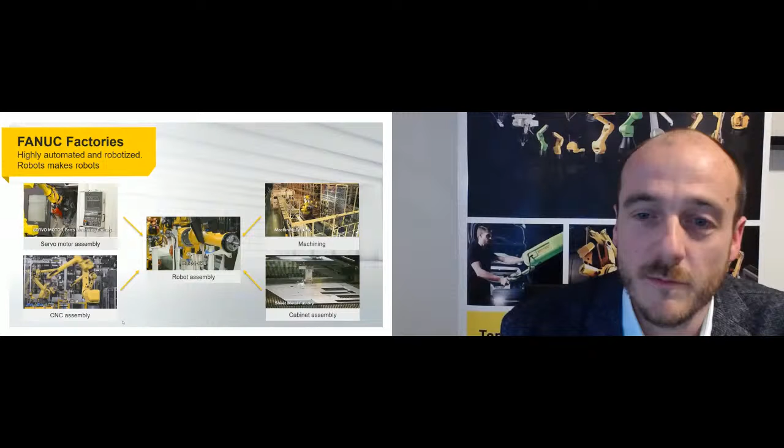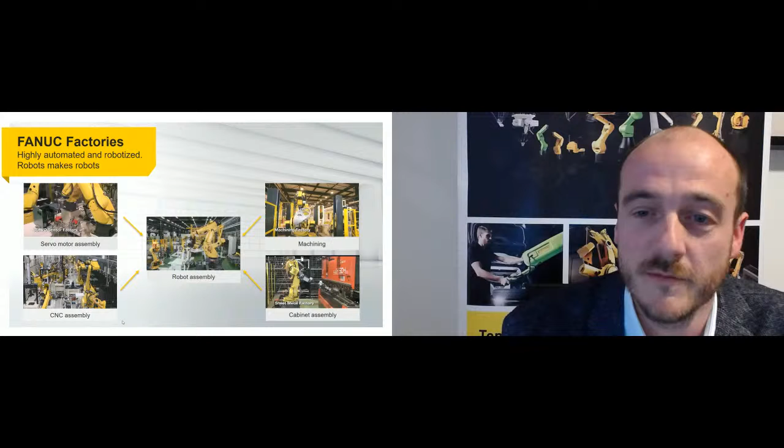Fanuc is the automation factory, and we state that especially when we have a look into our own factories. We live automation in our own factories, which means we have a highly automated and robotized factory. In our premises, robots make robots. This is not just a story, as you can see on the videos shown below — these are real screenshots directly from our factories. Our factories have numerous robots in place; right now we're talking about several thousands of them in our own factory.

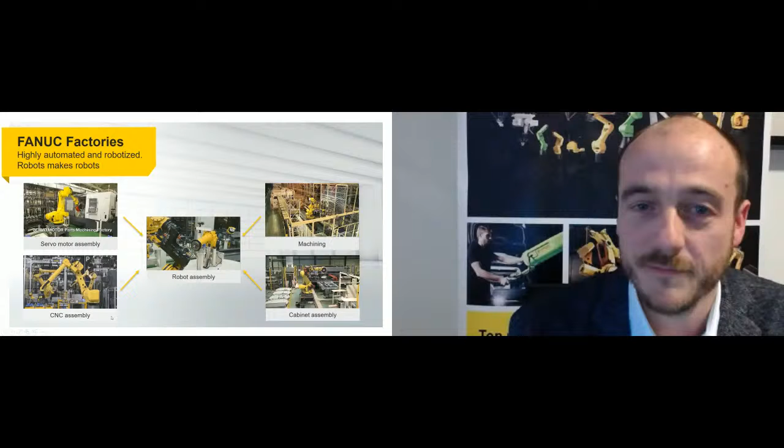Fanuc's range of robots is very wide — we're talking about more than 100 robot models. Here you can see a short lineup of our models, covering a payload range starting from 0.5 kg up to 2.3 tons, across different types: articulated series, SCARA series, palletizing robots, delta robots, paint robots, and collaborative robots.

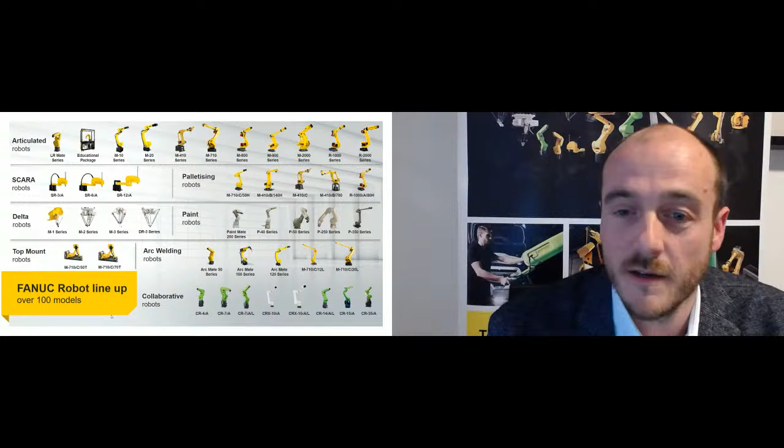Today I want to talk not only about typical Fanuc or industrial robot application areas — applications you probably all know, like spot welding, arc welding, painting, typical handling applications like loading, unloading, or palletizing. Another very interesting application is washing, which you can see on the bottom right corner.

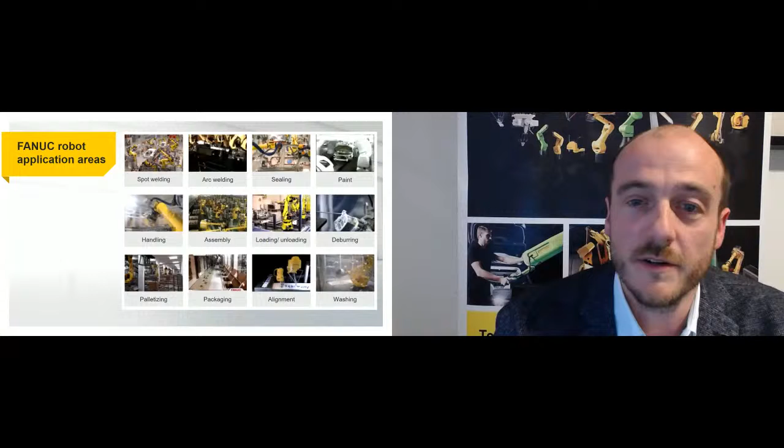Today, I want to talk about some solutions for rather new fields where industrial robots may be applicable. I want to start with our solution for high accuracy applications.

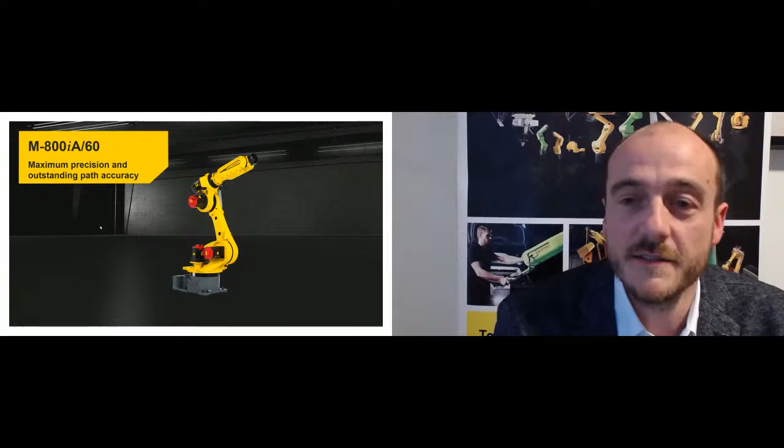This is rather something that was more related to conventional automation solutions like gantries or other forms of automation. Today, I want to introduce our brand new M800 series, our industrial robot with maximum precision and outstanding path accuracy. But it's not just an articulated robot with 60 kg payload and 2 meters reach — the robot comes with additional features like high rigidity, a robust construction specifically designed to increase precision in the application.

It comes with IR calibration signature, meaning it's an absolute calibrated robot, already included as standard. It brings high accuracy, ideally suited for laser applications or others, and has very fast and accurate motion, especially in narrow corners, which improves the quality of laser cutting or laser welding, for example.

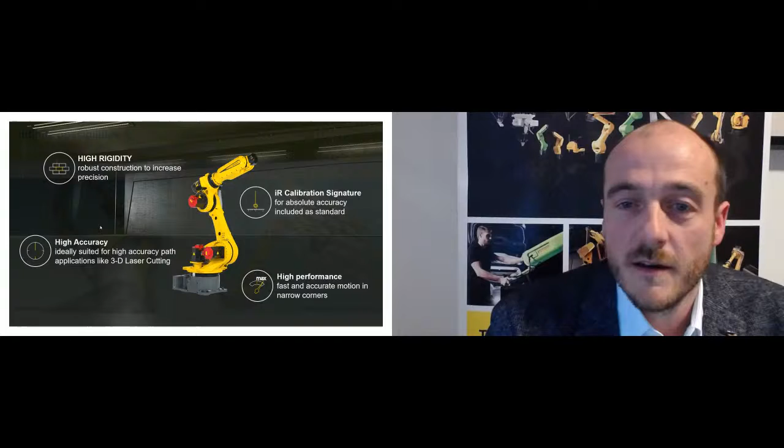Another example of a high accuracy application could be drilling systems, known from the aerospace industry or other markets where drilling or milling with robots is considered. We have that solution ready to go with the new M800.

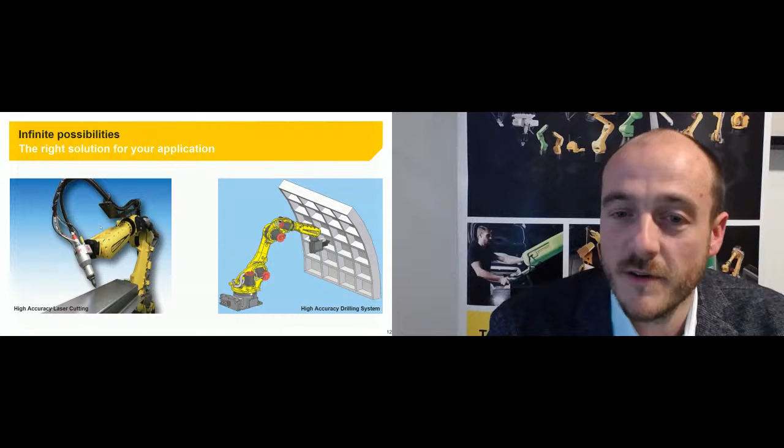On the next slide, I want to show you a quick video on the capabilities of the robot. You can see very fast motions with high precision, especially in the corners. This can be used, as I said, for laser welding, laser cutting, and probably other applications you may have in your facility.

I want to come to another point. I want to introduce to you our solution for human-robot collaboration. And therefore, we introduced a new era of collaborative technology.

We introduced this year our brand new CRX series. The CRX series is our new collaborative robot. You probably ask yourself, what does the abbreviation CRX stand for? It just means, in other words, collaborative robot, and the X stands for the next generation.

The CRX itself brings lots of brand new features with it. As you can see here on the slide, some bullet points: it has a complete new lightweight ergonomic arm design, which you've probably never seen before on a Fanuc robot. It has a brand new lightweight compact controller, which runs with 230 volts standard.

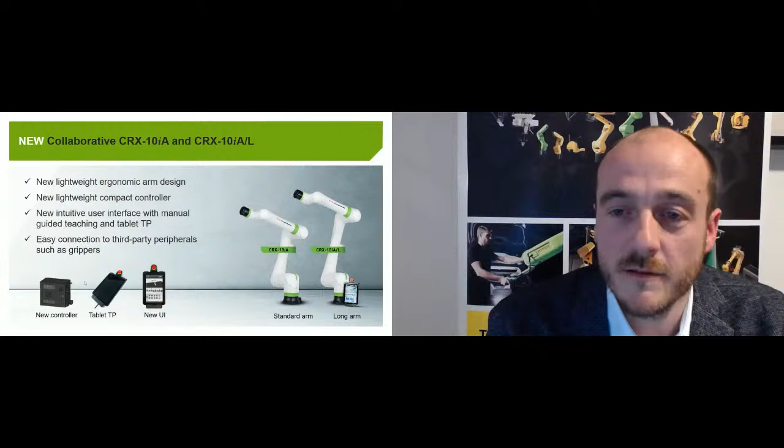It has a completely new intuitive user interface, which can be controlled and used with manual guided teaching, and of course a brand new tablet TP with our new interface. It also brings an easy connection to third-party peripherals, such as grippers or other equipment, which may be used together with that robot. And therefore, we provide several possibilities to do your own app design and bring your functionalities together with that new robot.

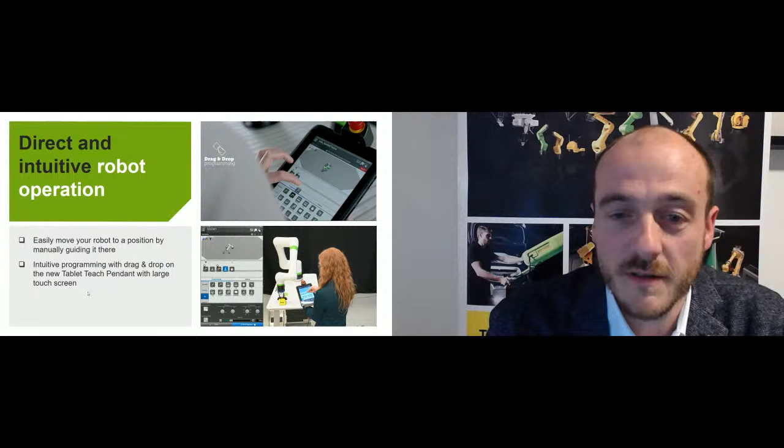I want to go a bit deeper into the new interface and especially the direct and intuitive robot operation. That means, in other words, you can easily move your robot to position, of course, with manual guiding. This is probably known by one or the other cobots as well, with our standard robots. But what the CRX series brings with it is the new programming, which works with a completely simple drag and drop programming on that new tablet TP with a large touch screen, which you can see on the next slide.

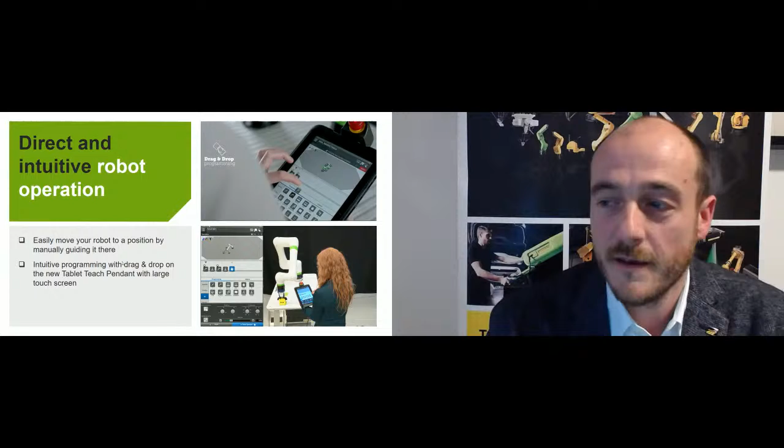There you have a screenshot of the new app, the new interface, and it is divided into 4 sections. That brings the status bar in the very top of the screen, where you can find some drop-down menus and status icons to navigate through the app itself. You have a 3D view panel, which shows, in this case, the robot itself, but you can show it also together with the environment, with some grippers or other equipment surrounded by the robot. This typically helps you to graphically display the robot status, as well as taught positions or the complete program itself.

In the next section below, you find the timeline program view, which brings an intuitive program representation and a very simple program navigation. That means via drag and drop, coming from the programming panel on the very bottom of the screen, you can put the icons to the timeline, and with that simple action, you generate your program and are of course also able to adjust parameters in the details section, which you can see in this area.

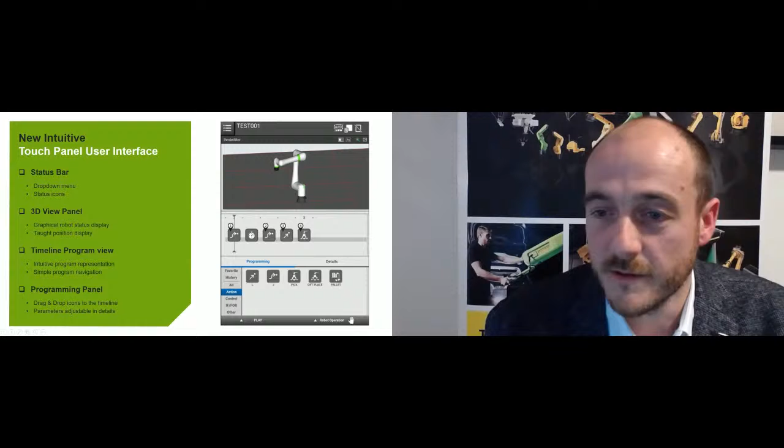Of course, when we're talking about cobots, we are not talking about typical robot applications. And in the very beginning, I said I want to introduce you some solutions, but solutions is not only the product itself. When we pay attention to cobots, we typically do not speak about low cycle times or high-speed applications, robots behind fences, or even dangerous tools, like you can see on that picture.

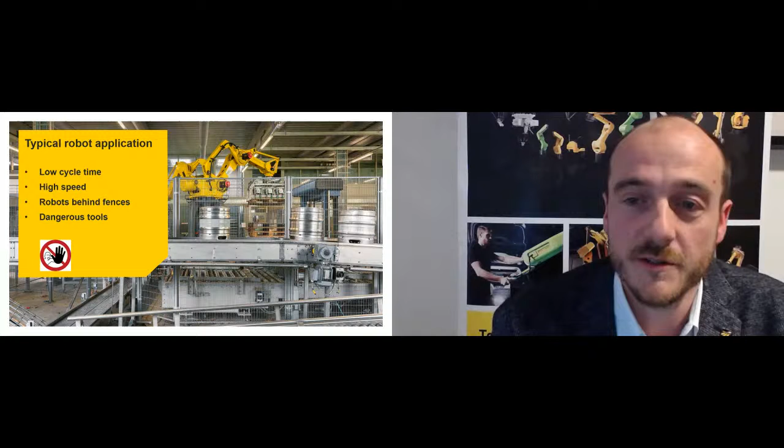I want to talk about solutions with our new colleague, the colleague robot. And therefore, of course, employee acceptance is a very important point to work hand in hand with the robot. And therefore, to provide you a real solution, we developed a new guideline to ask yourself whether cobots are considerable in your daily business.

In your factories, we created 7 steps for that reason, and I want to introduce you now to these 7 steps one by one. So the first step of all, of course, is you have to assess your current business and possible barriers to development. That means you should ask yourself, which markets could you enter with better quality?

Of course, if you talk about robots or automation, one of the most important factors is always to increase quality, and of course customers demand that as well. The next question you could ask yourself is, what would your production capacity be on a 24-hour, 7-day basis? If you're talking about small or medium-sized enterprises, probably only 1 or 2 shift models are in consideration today. But introducing robots could considerably increase your production capacity itself.

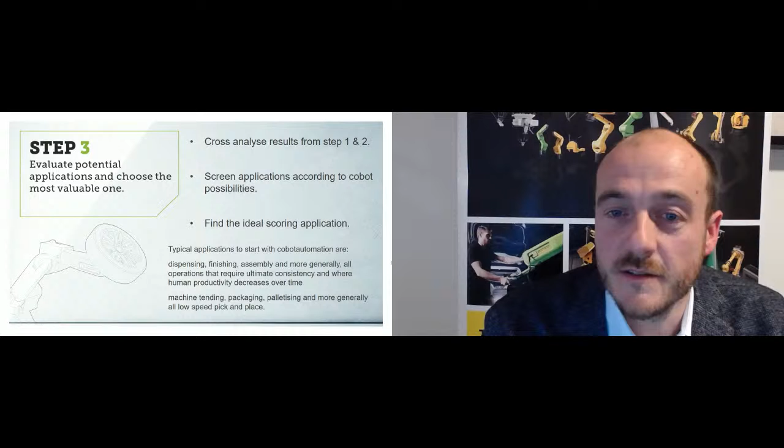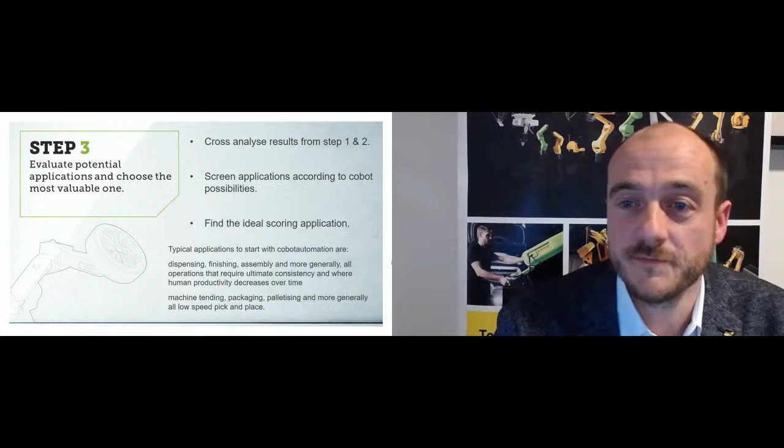That means cross-analyze the results from the first two steps, screen applications according to cobot possibilities. That could be pick and place applications, quality applications, finishing or assembly applications, machine tending, packaging, palletizing. In other words, there's a full range of different applications where cobots might be implemented, but you have to find the ideal scoring application.

Step 4 is eliminate safety concerns. So if you identify the kind of collaboration, you have to identify: do the robot or cobot and the employee work on their own but share only space? Do they collaborate indirectly with humans? Does the cobot assist humans in a particular task, or does it collaborate directly with humans? These four different scenarios bring up different possible applications and different needs for the application at the end of the day. That means make sure you will always be able to use your cobots wherever you plan to.

Step 5, of course, ROI. When it comes to money, you have to define the return on investment and especially the time frame. So you could value all expected benefits, as I said before, coming from higher production capacities, coming from better quality. Set your investment cost targets.

When we're talking about investment cost targets and cobot automation, given the investment of a cobot application, you typically find out that it is way lower than a conventional automation project. Therefore, you can expect the ROI coming faster compared to standardized automation. And when you do all these steps and find out the ROI is exactly where you want it to be, then you could choose your right cobot, which comes with the application as said before.

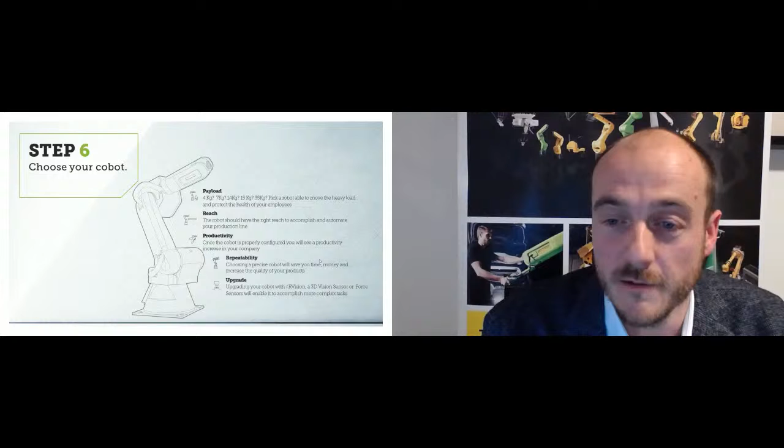And the last step is also a very important one. Our recommendation is really look beyond your first cobot. This is necessary - use your first cobot to reveal passion for robotics in your company with your employees. Nurture curiosity about robotics in the automation world itself, and as the last step, get ready for new applications.

Here we have a quick checklist for recap, so you can quickly assess these topics. Assess current business and barriers to development. Address automation starting from your most valuable resource, your employees. Evaluate potential applications and choose the most valuable one. Eliminate your safety concerns, define your ROI and the time frame. Choose the right cobot, and once it's installed, look beyond it.

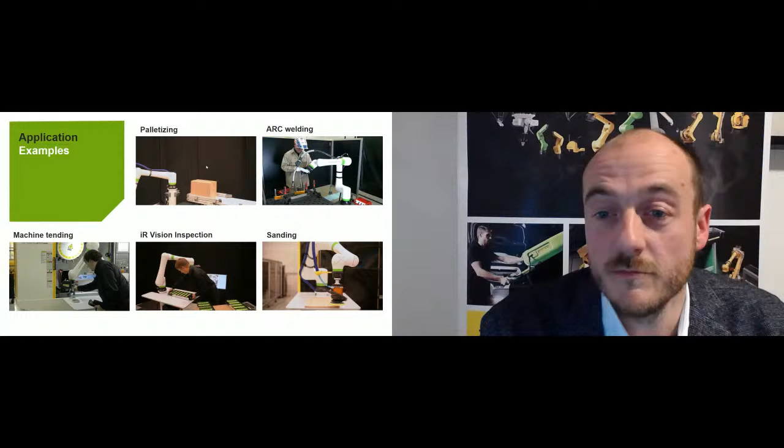Now I talked a lot theoretically. I want to show you some real applications coming out of the field, which shows you the broad range of utilizing cobots. The first one is palletizing, where with manual guided teaching, you can simply position and program the robot for your palletizing tasks. You quickly install the application, and the robot takes over a task which is, compared to an operator, probably very exhaustive.

Another interesting application for cobots, especially the easy programming and intuitive interface, is arc welding. In the last months and years we've seen a big increase in using cobots for arc welding. The advantages are definitely a very easy setup, especially for small lot sizes. You can easily adjust and teach the robot to carry out typical arc welding tasks, and given the high rigidity and good performance of the robot, you can ensure a proper weld seam.

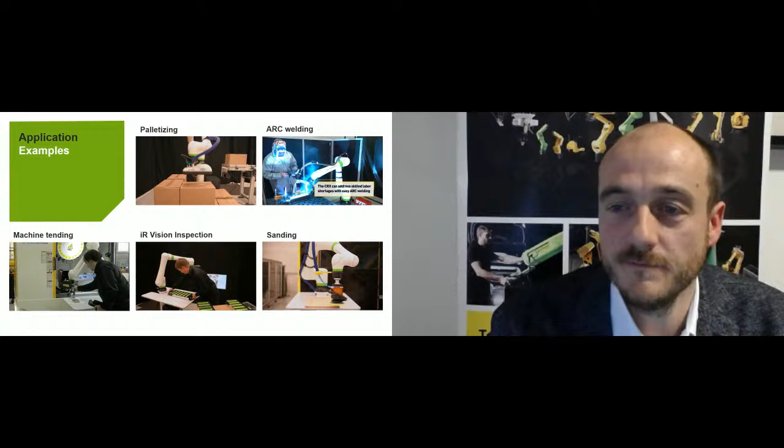When it comes to machine tending, the cobot can assist you in a very easy way. Again with manual guided teaching you can simply adjust it to new products and new tasks. You can enlarge the scope with additional camera systems to find raw parts on a pallet, and then easily connect it to your milling machine, lathe, or whatever. Often the robot is placed on a small mobile facility, so you can load different machines very easily and bring it from one station to the other.

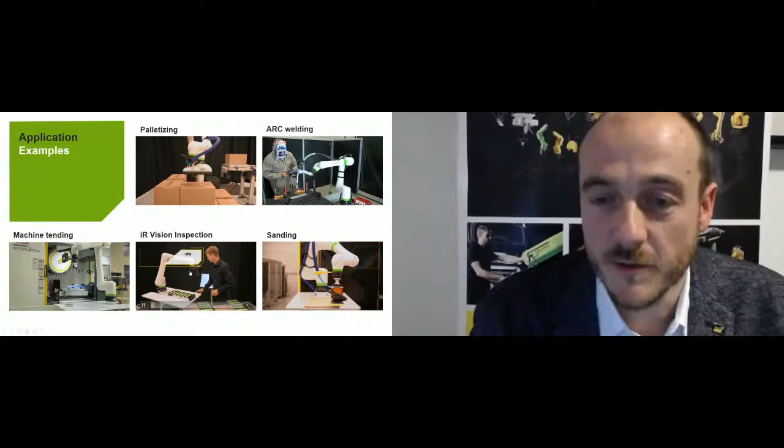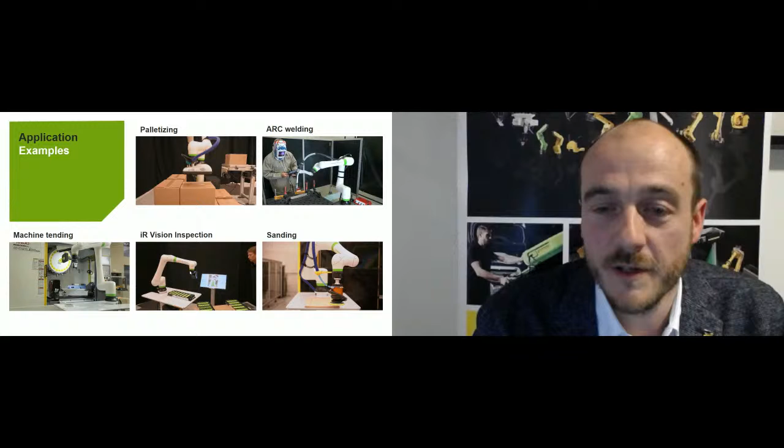Quality inspection is also a very interesting application for cobots. In this example, the robot is used for inspection of battery trays, and the system compares images to the actual parts and defines IO and NIO parts. Here's another example: this one does not pass, so the operator places the red button onto the tray, and the quality is ensured.

The last example I want to show you is sanding. Cobots are also used for sanding applications combined with additional force sensors, for example, which allows the robot to smoothly finish surfaces, as shown in this video.

That brings me to the end of my short introduction to new solutions for industrial robot applications. And I want to leave you with one last question: why settle for less when you can get more? At this point, I want to say thank you for your attention.

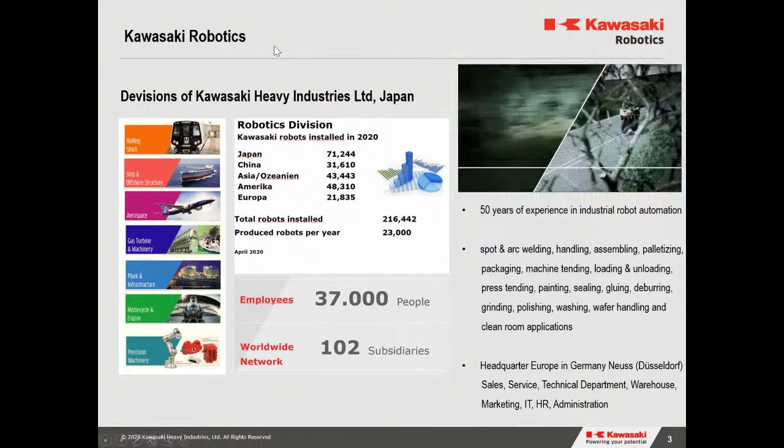In the next few minutes, I will speak about arc welding in combination with mid-sized companies. But first, let me give you the entry into this subject. Our vice president said a good sentence: nothing is more constant than change. And I think that is very easy to understand.

We had 4 industrial revolutions: the mechanization, the first mass production, then we had the computers and the first robots, and then we talked about machine networking, the IoT, the digitization since I think 2 years. But my point is, don't forget the low-hanging fruits, and that's a very important point for the medium-sized companies. The low-hanging fruits are often forgotten. Instead, companies believe that the use of artificial intelligence for process automation is a must-have. And I think, is that always the right way? I think perhaps, but I think Kawasaki has the job to provide easy solutions for process automation.

But to understand it in medium-sized companies, I think we must clear the question: what exactly does process automation mean? Automate recurring processes, it's clear. Increase productivity, okay. But I will show you in the next slides what is very important for the medium-sized companies.

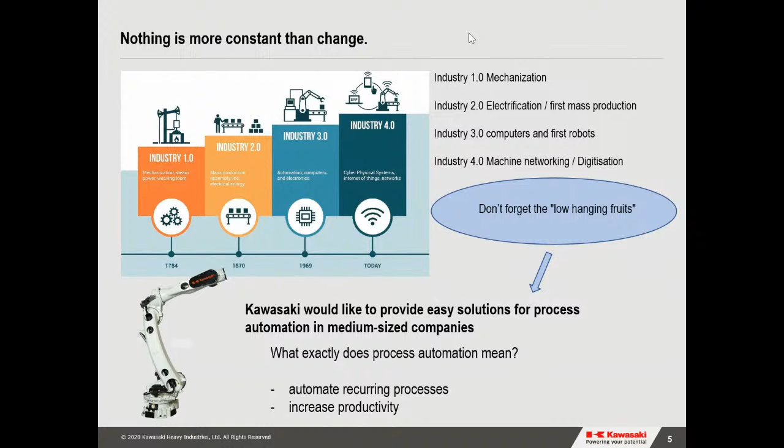The current situation, as I told you, is not so easy. Let's have a look at the current situation. COVID-19 is a very big problem - the pandemic has shown how vulnerable supply chains are. If more companies produce locally here in Germany in the future, I think robotics will play an important role.

The last few months showed in my discussions with customers that everybody in medium-sized companies wants to automate, yes. And they see the need, but they have strong reservations. That's our job, to find a good solution.

Why reservations? We have the high cost, the technical hurdle, expert knowledge is needed. A very big point is that mid-sized companies often do not know what it includes and where to start. My job and the job of the German sales team of Kawasaki Robotics, and all over the world, is to find the right solution.

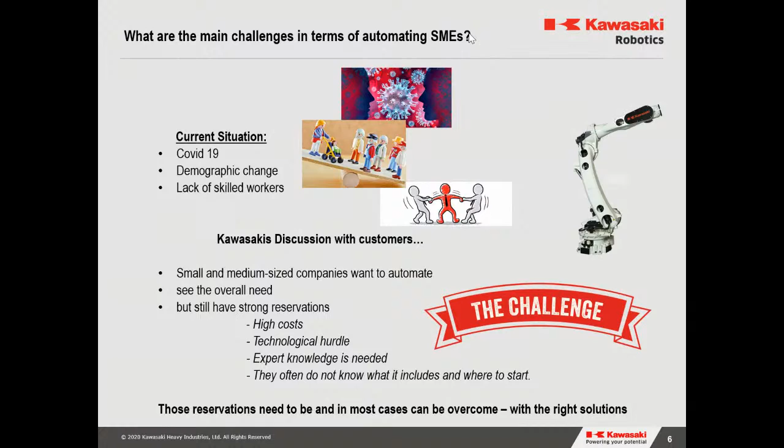But the very big point is that we give the right solution for the medium-sized company. Advantages are clear: higher output in production, production on a high quality level, you save time and cost of course, less monotonous work. It's very important because you can give the good workers more important tasks. Ergonomic working conditions are very important because you let the robot do the difficult work. So when you have the right solution, you can secure the production of the medium-sized company, here in Germany and all over the world, on a long-term run.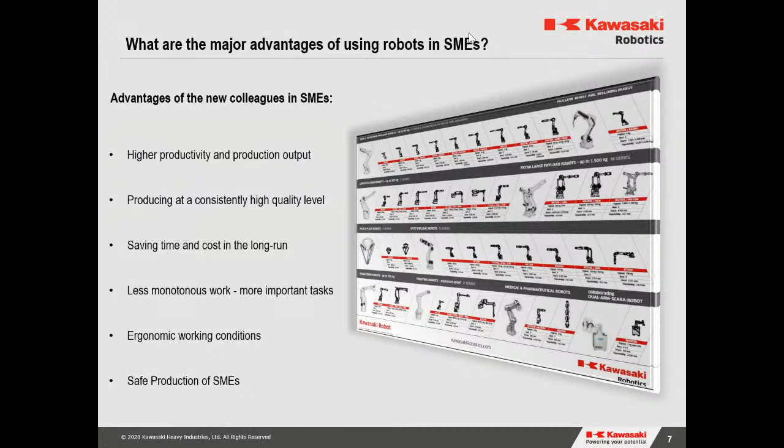It is important for small and medium-sized companies to make their own experience with robotics and automation. Only when they do their own experience do they know what is good and what is not good. My experience at Kawasaki Robotics is when they see the high quality, the little downtime, production at night and on weekends, and that the robot is not ill, then they can understand where they can use robotics. So the start is much easier, because when you have one robot, it's not a long way to install robot number 2, robot number 3, and so on.

We at Kawasaki Robotics pay attention to user-friendly systems. Acceptance is determined by the quality of the new interfaces, and that's very important. It must be a plug-and-play solution.

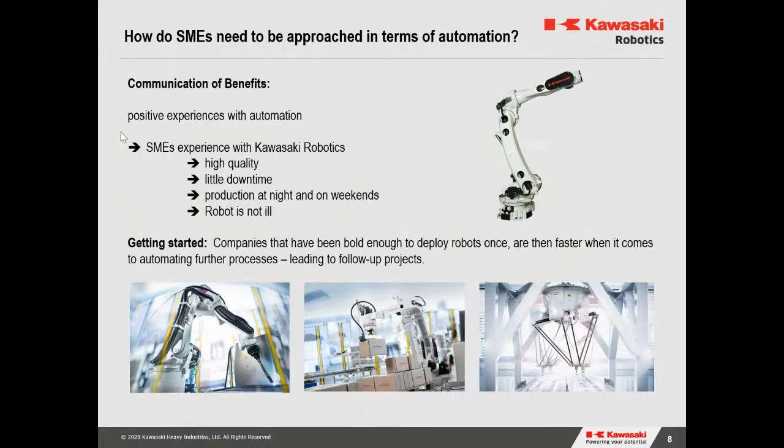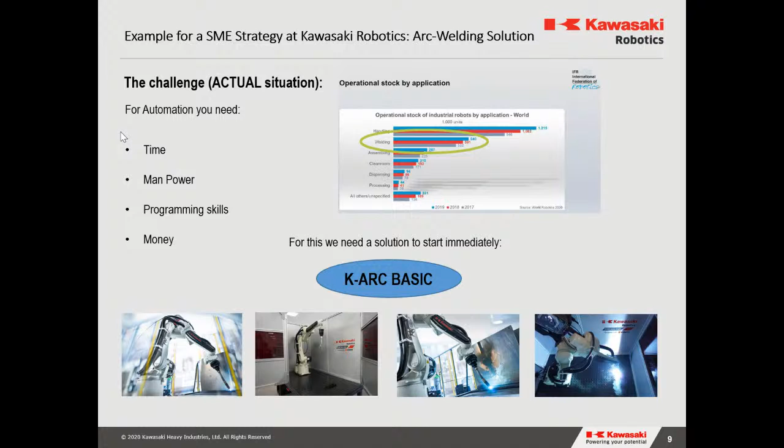We try to combine the advantages of automation with the flexibility of an experienced welder, and that's it. We need good quality, high speed, good efficiency, and no downtime. The Kawasaki Robotics K-ARC Basic Single offers a complete turnkey arc welding robot solution for your production.

Everything you need is within one compact cell, suitable for MIG and MAG welding, flexible and powered by a Kawasaki robot — for example, in this case the BA006N, which is only the name of the type. The robot, and we have some more high quality components. I will give you an idea of plug and play. K-ARC Basic Single provides everything you need to automate your process.

When we go into the technique, it's much easier to understand. You have a complete cell with a safety module, Cubic S, included, and complete arc welding equipment. It's ready to weld. I think this is a lower barrier to entry for medium-sized companies. But this is only the hardware.

Yes, first we have the hardware, and now we need the software to have much easier programming than in the past. Because in the last 20 years — as one guy in this presentation told us — nothing changed. Everybody thinks it is a hurdle to program a robot.

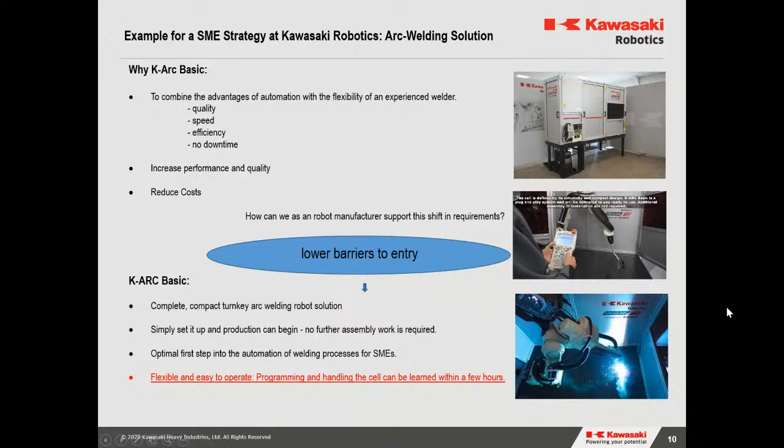We have the software K-Virtual. That's a point I will point out. With K-Virtual, Kawasaki Robotics has a new 3D simulation software for plant engineering, robot simulation, and offline programming. With K-Virtual, we offer you the optimal tool for planning your individual SME automation solution. It's very fast to learn, and it saves time and money. You can see it on this video.

When I worked at a medium-sized company as a machine builder, we always had 3D programs, but it was not so easy. This is an intuitive program where you can have all our robots, and you have the digital program of the process.

So we have the answer to this question: who should program so many welding robots? You. That's the answer, you with this tool. It's intuitive, easy to learn, only in a few hours. In our academy in Neuss, we have the possibility to show you this tool.

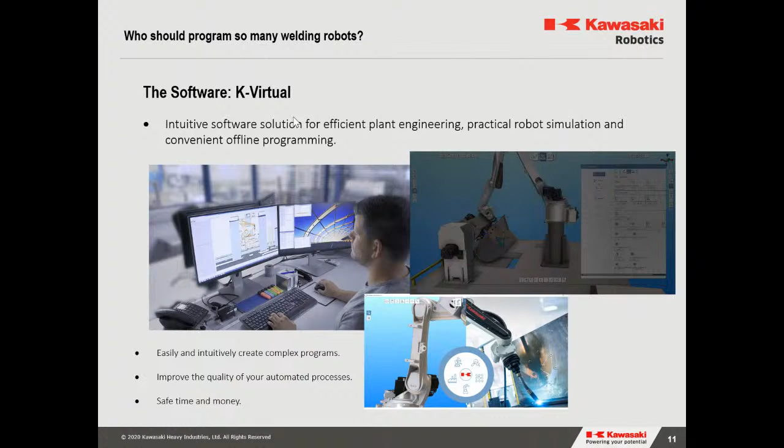Now we had the hardware, we have the software. But what is hardware and software when you have nobody to take care of you? So we take care of you with our service department, with our service guys. I think very important for this is the principle of MVP, meaning Minimum Viable Product - quick and simple solutions that support you with intelligent algorithms.

We have two new Kawasaki service concepts since a few months. On one side, the Trend Manager. This software automatically analyzes all data of your robot, so we can use it as a diagnostic tool to predict inspections and give information about problems at an early stage. On the other side, we have the smart glasses.

Everybody here knows downtimes and shutdowns are the worst case scenario. I'm sure predictive maintenance with Kawasaki Robotics concepts reduces this risk to a minimum.

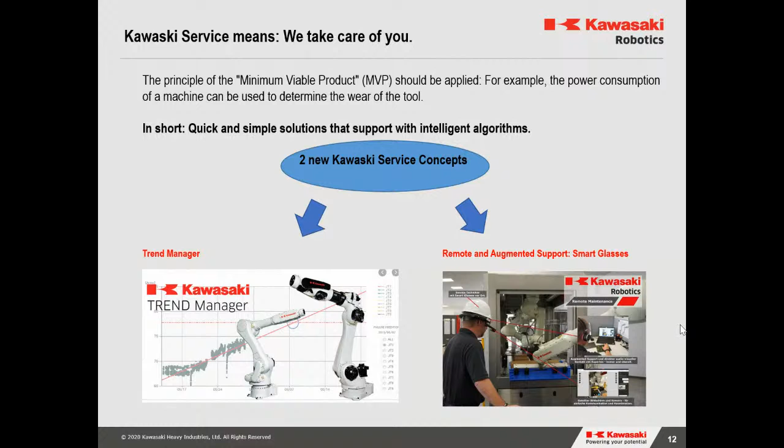To complete our portfolio of arc welding products, you can see here the robots as well, that's a basic of course. You can see the positioners, they are very new - we have our own positioners today. And the linear tracks here. But sorry guys, due to the lack of time, I am not able to discuss these products.

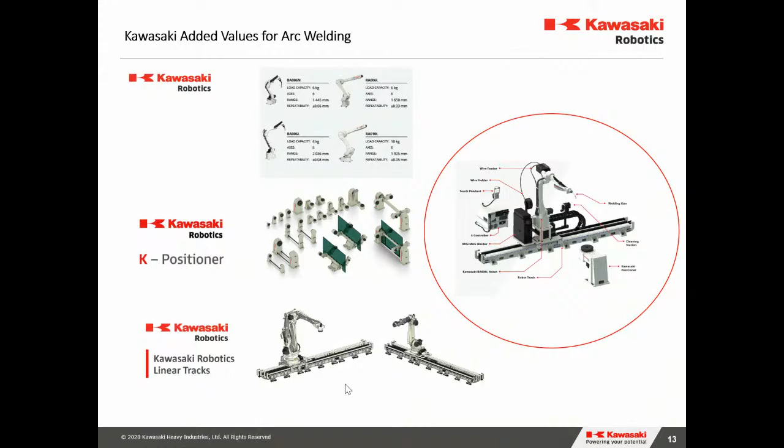So I think it's very important to come to my conclusion. Every time I think it takes people and technology. In the market there are a lot of innovative technologies, in a starting position, offering new possibilities for medium-sized companies. Not doing anything would weaken the mid-sized companies' competitive position, making it difficult to win the challenges in the future. So my recommendation is: be open for new technologies and use what works for SME processes. I think Kawasaki Robotics can help you with this.